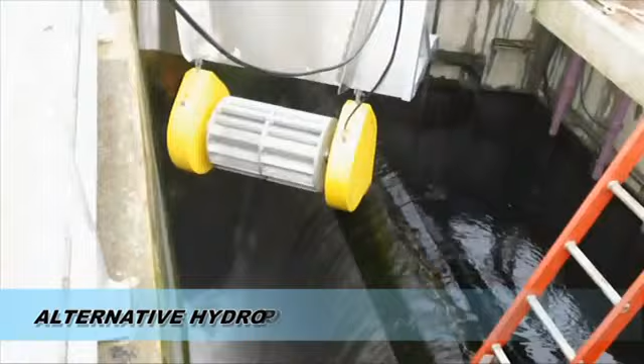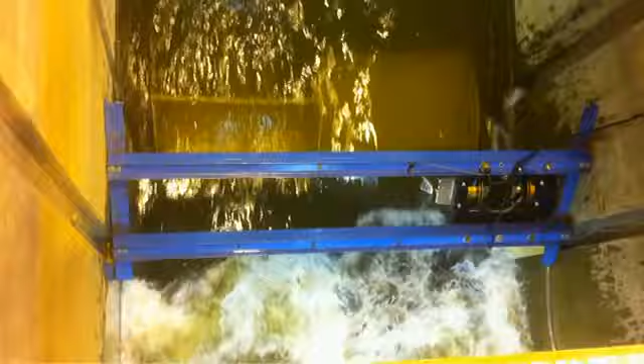There is a rapidly increasing demand for local renewable energy generation. Any new source of local clean energy is of critical concern. Water flows big and fast in millions of places around the world, and new hydrokinetic technology, along with other new enabling technologies, makes micro hydropower generation in these places now feasible.

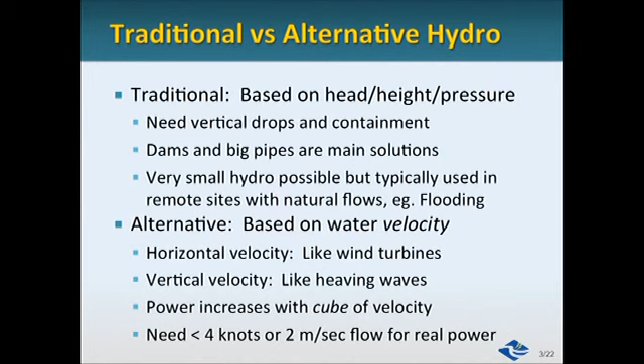In the physics of hydrokinetics, a very important factor is that power increases with the cube of the velocity of the water. So if you double the speed, you get 8 times as much energy. If we go from 2 meters per second, or 4 knots, to 3 meters per second, we don't get 50% more power, we get roughly 3 times more power. So speed is everything in hydrokinetic alternative energy. You really need about 4 knots, or 2 meters a second, to get useful power—that's about a fast walking speed. So if you see water and you're walking fast to keep up with it, there's energy there. But if you're just ambling along, there's not a lot of power.

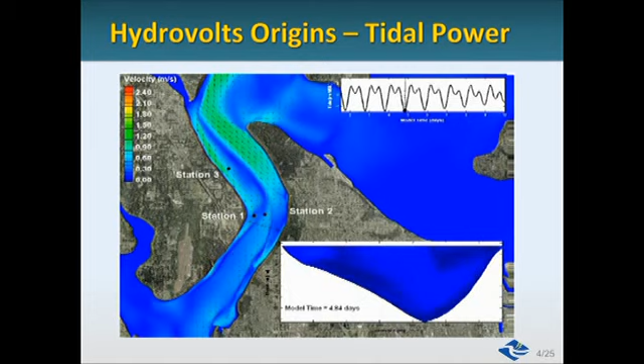As you can see, there are places where the water is fast and big, but it's very intermittent and extremely turbulent. That's an indicator of the problems with tidal power in general: even though it's predictable, it's chaotic, and it's difficult to site things in just the right place because of the turbulence. As a consequence of the lack of speed in most places, plus these problems, tidal power in the USA is not practical.

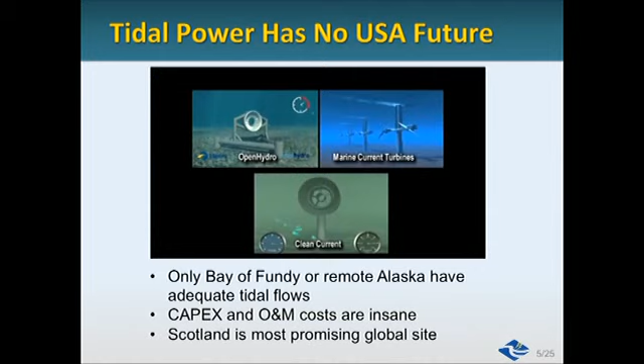It doesn't have much of a future because only places like the Bay of Fundy and remote Alaska have water velocities fast enough to really drive a turbine and make it practical. The other problem is that the capital expenditure and O&M costs of these things are just insane. Our own study showed it would bring power to shore, if we could build it, at around 35 cents a kilowatt, whereas natural gas can generate power at about 3 to 4 cents a kilowatt. There is no competitive advantage here from tidal power.

Around the world, Scotland is actually the place with the best sources for tidal energy, and they're very active on it. But that's really it - there's not a lot of other sites.

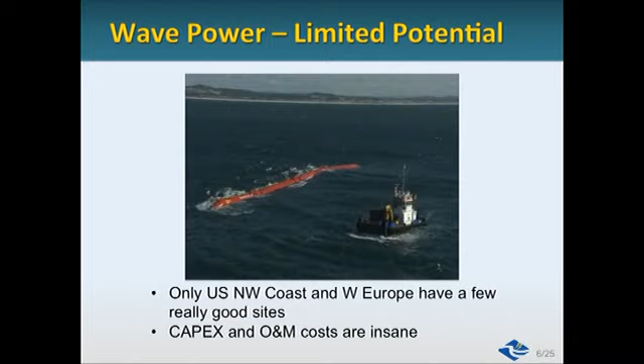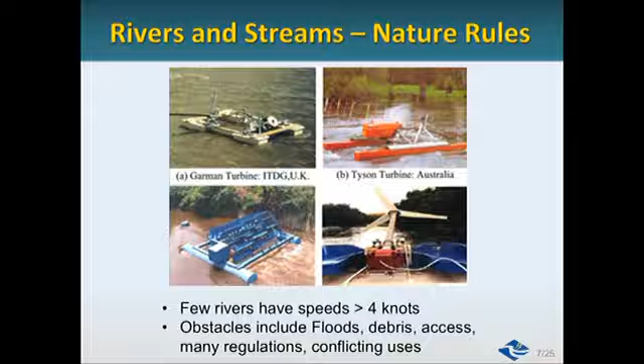Nature puts floods and trees and animals and regulatory agencies in your way. It's even hard to get into the river and hold on to something because it's not a natural environment. As a consequence, we don't see much of a future for alternative hydropower in rivers and streams.

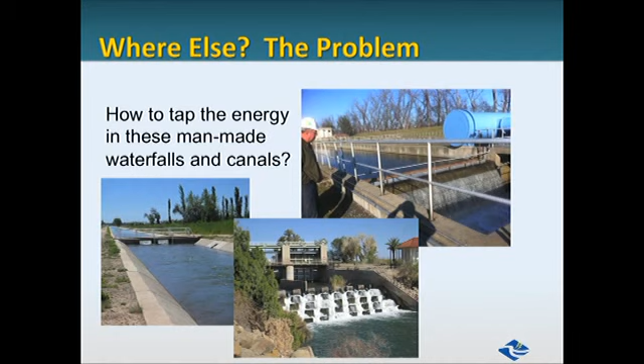The water is managed and owned by engineers, so it's predictable. Second, it's filtered - they keep the trees, coyotes, cars, and teenagers out of it as much as they possibly can. Third, because it's an artificial system, there's usually no environmental issue there, or if there is, it's a very minor one. These are not natural habitats, so they don't have to go through the kind of environmental problems that others do.

So our solution to tap this resource is our new waterfall and canal turbines at Hydrovolts. We've invented a snap-on waterfall turbine that hangs on the edge of a concrete wall and captures that water falling down. It's portable and can be installed quickly. We also have a canal turbine that installs in a typical irrigation canal and also makes power. They can make power for 3 to 4 homes per turbine, so if you have a bunch of machines, you can power a lot more homes.

This solution is really important because it means we can put these things in quickly. These are concrete ditches or concrete environments, so you can walk up and hang stuff in there really fast. We can install a turbine in a day - we can do hydropower in a day. Whoever heard of a hydropower system being installed in a day?

Second, it doesn't take much in the way of permitting because these are owned by big organizations and they can handle all the permits themselves, if a permit's needed at all. It's also modular and scalable, in that if you have a bigger canal, you can attach turbines to each other or put them one after another down the length of the system.

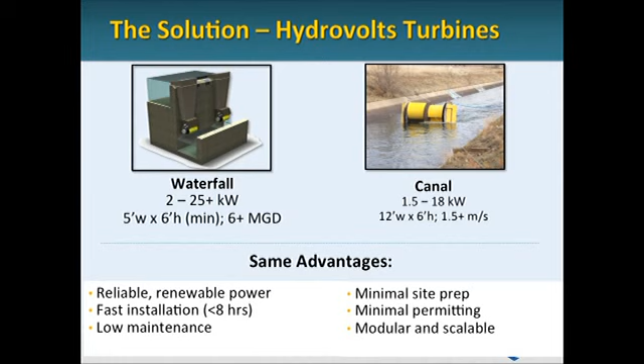The value proposition, because it's simple and fast, is a lot better than many other resources. So we're aiming in our technology to deliver a value of about 4 to 6 cents a kilowatt for power output, and giving the customer a return on their investment of about 6 to 7 years in a market where electricity costs 11 cents a kilowatt.

11 cents is the U.S. national average. It's a lot higher in New England and California, and a lot less in places like North Dakota with a lot of coal. So the value of the technology depends where you are. In our case, we're looking at markets much beyond the United States where power is a lot more expensive, such as Europe, or where it's subsidized in other areas such as Japan.

So what we've done in Hydrovolts is we have taken 3 types of technologies and a key business model. First, we're using a cross-axis, what we call switchblade hydrokinetic rotor that allows us to put different types of rotors on the same shaft. So it's adaptable to a lot of different sites.

The second thing we're using is low-speed permanent magnet generators that don't require a fast transmission to make them run. That eliminates the need for a gearbox and also for speed controllers. So all of a sudden, the power generation side of it just got a lot cheaper and more reliable.

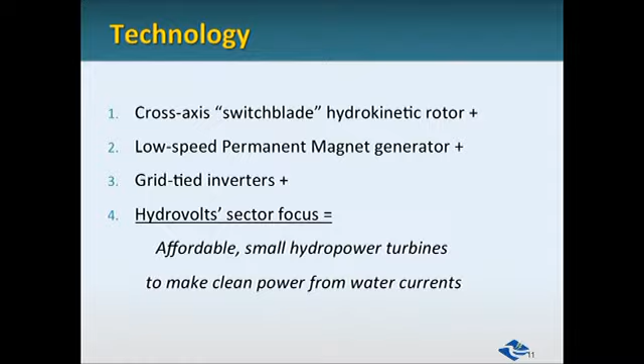We combine those 3 enabling technologies with our sector focus, which is artificial, man-made, big water systems only. We're not touching rivers, we're not touching the ocean. The moment you touch those things, they're like tar babies. They suck you in and you spend all your money. Artificial systems makes a business model that works for this technology.

Here's a picture of our switchblade turbine showing 4 different rotor sets on it. We have in the upper left the high-speed Darrieus blades that are suitable for laminar, fast flows like you'd find in an outfall from a dam or in a discharge in a big channel. We have a Savonius design that's more suitable for slower speeds and more turbulence.

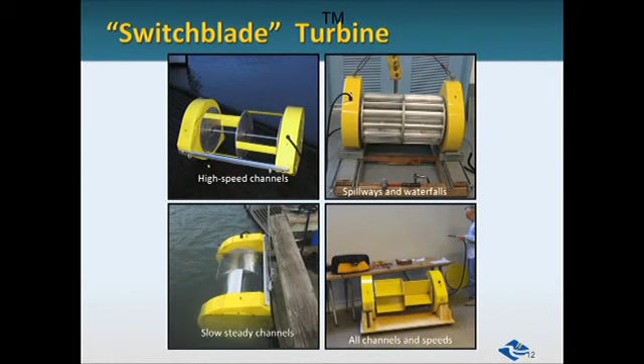This rotor is designed for waterfalls and spillways. It's a barrel rotor. And down below we have the flip wing rotor, which is my own invention, and that is designed to be useful in all these situations. So again, coming back to the key part of the business model, one machine now can adapt to a lot of different sites. So we don't have one turbine, we have a 4-way switchblade turbine.

The flip wing rotor is really quite unusual. What we have here is metal plates that are attached by a shaft on the outside of the perimeter. So in this video, you're looking end on at the turbine. The plates are just long enough to reach that center shaft, which stops the blade at that point, and the water pushes it over the top and it flips open, as you can see.

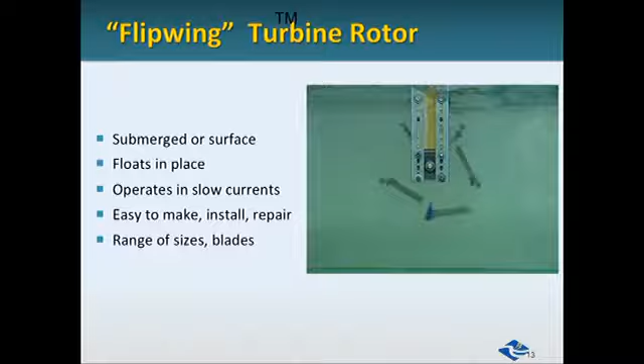It's easy to make. It's very hard to foul. It works in any velocity of current, and it can accommodate any size of blades. So we're very excited about this as a new rotor concept. It's not as efficient as other rotors are, but it's a lot cheaper to make. And what we're really talking about is total cost, not efficiency. So if it's cheaper to make, but a little less efficient, that still is a good deal.

So we took that rotor and put it on our small canal turbine, and here you see it in the process. It's now floating away in a canal here in Washington State. That particular machine you see in the video is about 4 feet long. It's able to charge up about 48 volts of power, charge a couple car batteries.

It's held in place with just 2 ropes, and the power line goes up one of the ropes, and it can be put in place with 2 people. So it can also be taken out. And we let that run in this canal for a full month in the middle of bad weather with a lot of crap in the water, and it didn't foul.

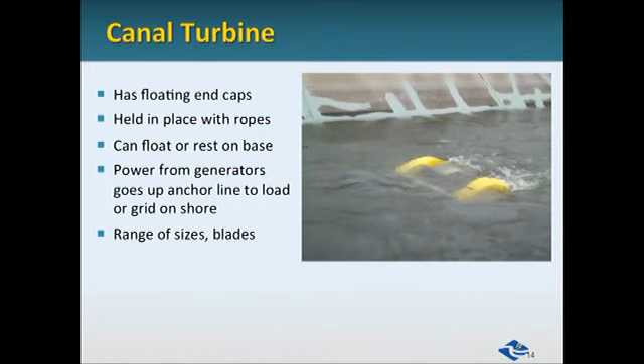The same machine was tested later by the U.S. Navy, operated in one of their facilities near Washington, D.C. This machine is about 6 feet long and 2 feet in diameter, able to produce about 500 watts of power, 24 volts at 24 amps. This is enough to power pumps and irrigation systems and provide backup and emergency power.

It's very interesting to the Department of Defense, which needs remote power in the field.

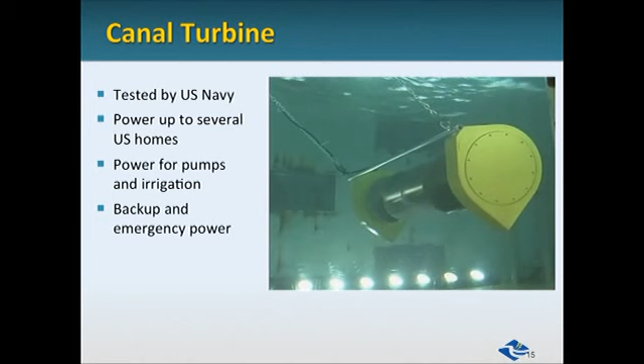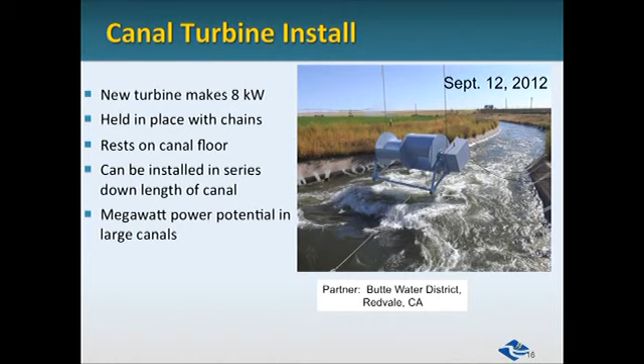We made a much bigger system and put it into a canal in Northern California at the Butte Water District north of Sacramento. This machine makes about 8 kilowatts, again held in place with 2 chains. It sits on the floor of the canal, and they can be installed one after another down the canal, chained together to make more power.

That's really the secret of what we're after with the canal turbines. It's like the world is covered with highways of water, and we've invented the first car. There are those long roads, and we can put one machine after another. They're all identical, so we can mass produce them.

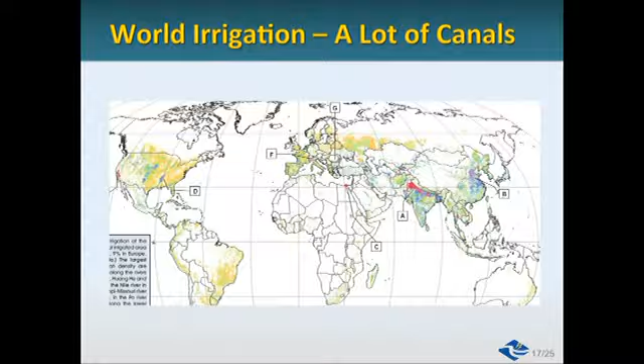Around the world there's a lot of canal systems. In the western United States, over 500,000 miles of canals in total. The Bureau of Reclamation, from the Department of Interior, operates 50,000 miles of canals. Other regions with huge systems are South Africa, Southern South America, Southeast Australia, India, Pakistan, Afghanistan, and interestingly Europe and Central Asia, the Uzbekistans and Turkmenistans, vast areas with big populations that need food, putting in huge canal systems to irrigate the land. So there's a global opportunity for one set of machines to expand all over the planet.

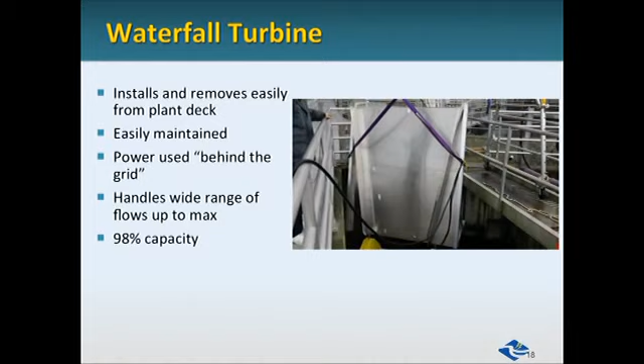We started finding waterfalls in the canals too, and then we found waterfalls in big water treatment facilities. We took our small turbine with a barrel rotor on it and hung it in the waterfall, and son of a gun, it worked just fine.

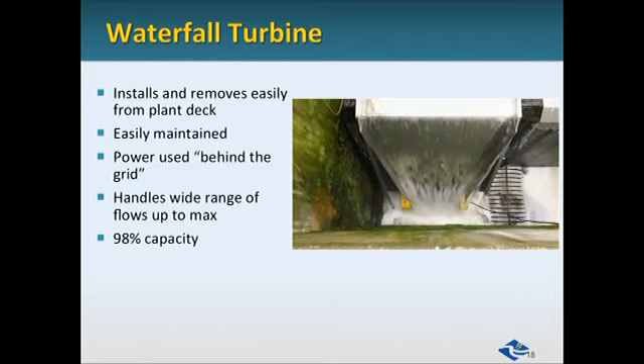So we've developed a new design for waterfall turbines targeting big industrial water facilities. These would be plants that typically have flows greater than 5 million gallons a day, which is a town of about 10,000 people, or a big factory with a big flow.

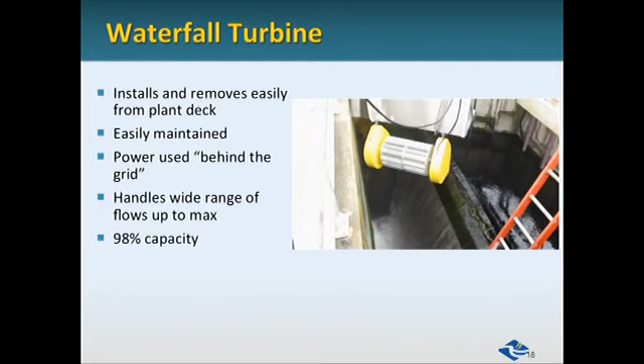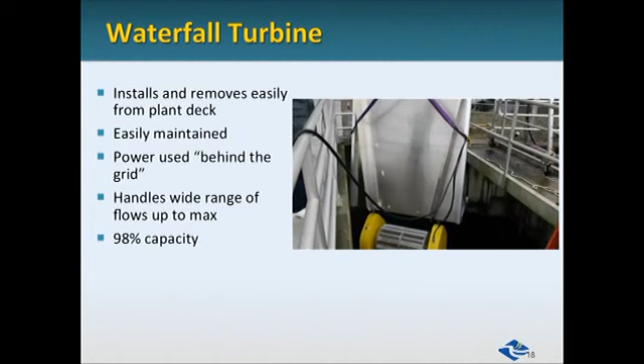These machines are able to generate power that is all used right inside the plant. They don't send it out to the grid. They already use so much energy, they just suck up everything from this turbine, and it saves them money. They don't buy as much outside power.

We started with a proof of concept, then built a shop unit to test it out, and now have a new design being installed in Northern California that will make about 15 kilowatts of power. We're very excited about this because the global water treatment industry is very well organized, and we've already had contact with several big multinational engineering companies that want to introduce this technology into their customer base, servicing all these big water plants.

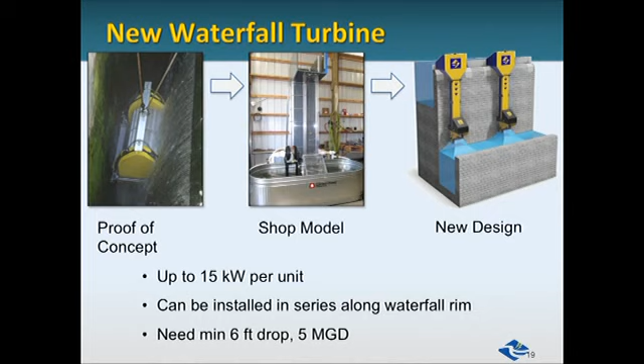Because of the uniqueness of our technology approach, but also our business model, Hydrovolts has been recognized by some very distinguished organizations. We've won a number of contests judged by venture capitalists and industry experts, such as the Clean Tech Open and Imagine H2O. The Launch.org group has awarded us, and we're very proud of that because these are venture capital people with a lot of business experience. They see the technology, they get it, but they really like the business model because they understand it has the potential to really grow big very quickly.

The entrepreneurs developing these typically focus on their technology only, and lack the flexibility that Hydrovolts has of using different types of rotors on the same machine, so they fit a lot bigger number of sites. Some of these folks are pursuing sites that are really quite challenging, where they've got to do a lot of site construction, so the cost is high even though the power output is low.

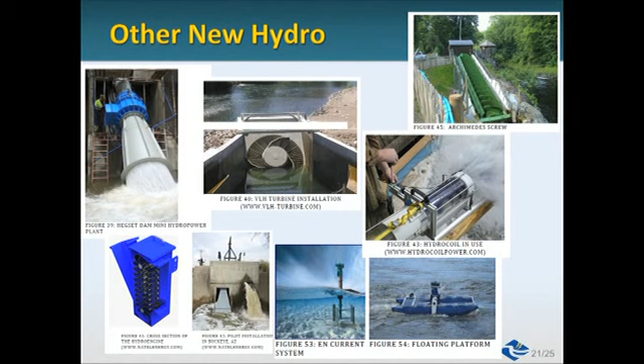I'm going to start finishing up here by talking about nanohydro. Nanohydro means making an extremely small amount of power from the water.

Why? Because you don't want to generate power for your house, you want to run data collecting sensors. A company from Israel called Hydrospin has a new turbine that fits inside a big water pipe, used to measure pressure differences between different places in the pipe so they can tell if they have leaks. Leaks are very expensive. Their turbine makes enough power to measure the pressure and make a phone call to transmit the data to a central system.

We're even looking at tiny turbines used in hands-free urinals and toilets. Here you see the Toto toilet makes a microturbine that powers that little flashing light, flushing the toilet or washing the sink when you wave your hands in front of it. It makes just a little power, but so does a USB port for your cell phone. So we see a very exciting future for nanopower generating power to run sensors and then connecting to cell phones, so now you can talk to your plumbing.

Finally, we'll talk about interconnection. This has turned out to be a big surprise to me personally because I thought it was a solved problem, and it turns out it's not. Connecting to something grid tied is quite different than connecting to a standalone microgrid. Microgrids have to have their own power management system, and so does the equipment in them. If they're not tied to the grid, a whole bunch of other electrical stuff has to be done.

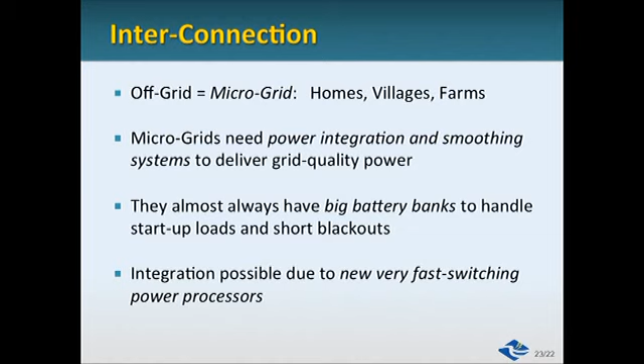You've got to have the box though, and it turns out it's not as easy as people used to think - I was certainly surprised. It's possible now because we have very fast signal processing chips, simply an evolution of computer hardware. Now we can process that electrical signal so fast that the machinery doesn't know there's been an interruption in a source. So computers are the next thing making micro and alternative hydropower possible. Now you can connect it much more effectively.

What do we see on the horizon for micro and alternative hydropower? We see regional demo projects we're involved with - we have a request from the government of India to do a demo there now. We see international power generation projects in sites that don't have as many big bureaucratic obstacles as the United States does. It's a lot easier to get a big project into a developing country that doesn't have quite as many lawyers as America does.

We see some agencies doing resource and facility assessments. For example, the federal government's looking at regions around the country to say, where can we do this new hydro? Let's map it. And some big water companies are looking at their facilities and saying, where can we do new hydro here? We're helping them as well.

We also see, over the long term, that canals and plumbing systems themselves will evolve to take advantage of new hydro. Canals have always been made wide and slow because erosion is bad for them, but we like fast water. Now, in a world where all the canals are getting lined with concrete to eliminate seepage and stop water loss, why not make the canal narrow and fast, and save money on concrete too? Several engineering companies have come to us with exactly that proposal, because that's going to change the way people think about canals as a whole - it's a change in the infrastructure paradigm.

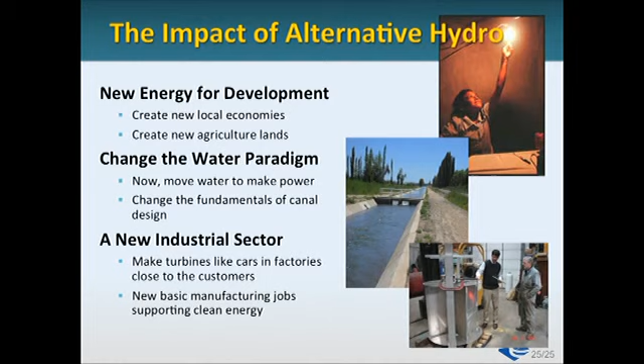It'll also change the way the water systems are designed, as I said. And then finally, it's going to make a lot of new jobs. This is big machinery - you see the turbines in these pictures. This is like making small cars or big agricultural equipment. This is going to create manufacturing jobs, which is very exciting.

So Hydrovolts is excited to be changing the water energy game. We can now make micro hydropower possible when it wasn't before, because we can use enabling technologies and a better business model that stays out of the very expensive natural environment. We can change the way water is moved from one place to another, because now you can design the infrastructure to take advantage of turbines that you didn't have before, and that'll change the way they pour concrete. And finally, it'll just make a lot of new things happen.

At the bottom of the pyramid, where there's a billion people without electricity, even a little bit of power can do a lot. With cell phones and LED lights, now you can both educate and communicate and stay awake at night with very little energy. So a small turbine can make a big difference to a lot of people.

So we're excited about being part of this GlobalSpec event and sharing this information with everybody. And I'm looking forward to your questions. Jim, thanks very much.